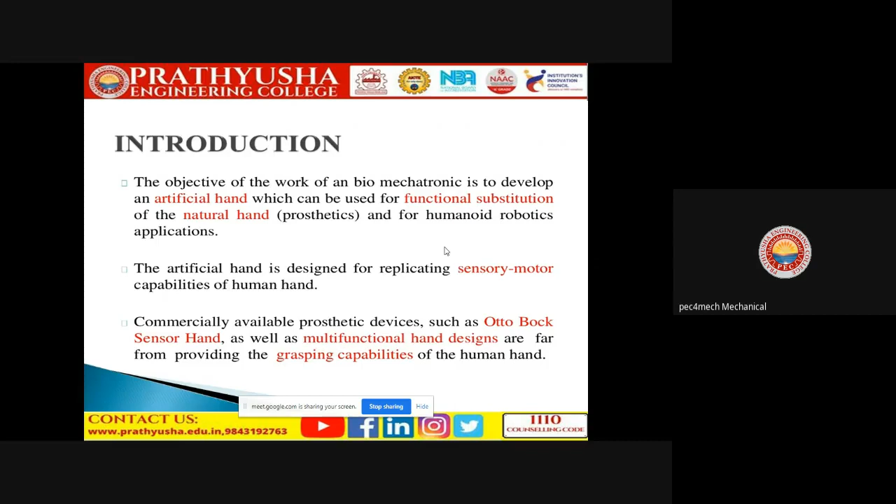So they need to do day-to-day work like us. To fulfill that task, the artificial hand is designed for replicating sensory motor capabilities like a human hand. There are some prosthetic devices commercially available, such as Otto Bock Sensor Hand as well as multifunction hand designs, which are far from providing the grasping capabilities of the human hand.

In prosthetic hands, the active bending is restricted to only 2 or 3 joints, and it is actuated by a single motor drive, which can act simultaneously on the MP joints, that is metacarpophalangeal joints of the thumb. In our fingers we have 3 joints: one is MP joint, the middle one is the PIP joint, that is proximal interphalangeal joint, as well as the DIP joint, distal interphalangeal joint.

Of the index and middle finger, while other joints can bend only passively. There is some limitation due to the very basic requirement of limited size and weight necessary for prosthetic applications.

On the other hand, robotic hands achieve a high level of performance in grasping and manipulation, but they make use of large controllers, which is not applicable in prosthetics or humanoid robotics, wherever it is necessary to provide the user with a wearable artificial hand.

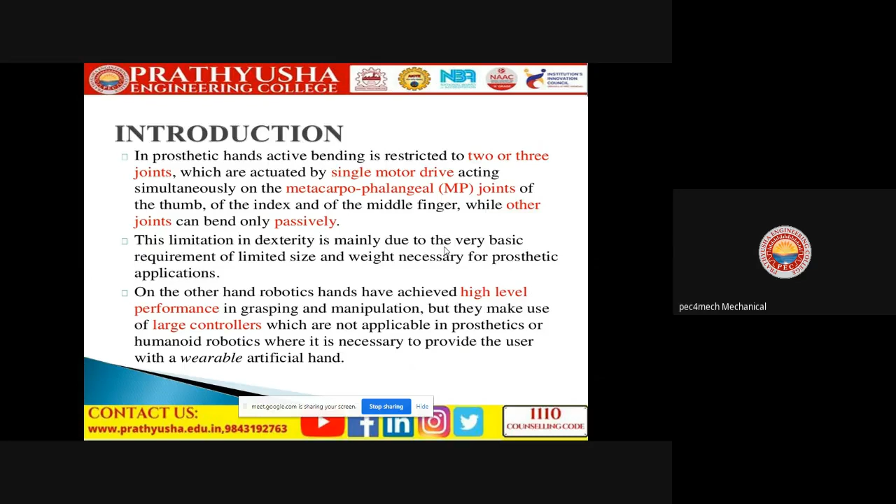So the basic design of the biomechatronic hand has main requirements to be considered since the very beginning of an artificial hand design: natural appearance, controllability, noiseless operation, light weight, and low power consumption. These requirements can be fulfilled by implementing an integrated design approach aimed at embedding different functions, mechanisms, actuation, sensing and control.

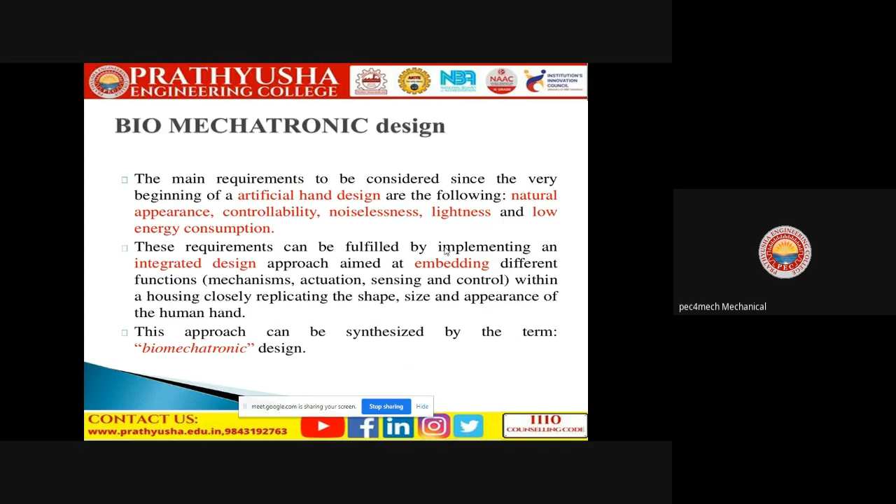This approach can be synthesized by the term biomechatronic design. The architecture is initially developed with 3 fingers to provide a tripod grasp, so objects of different size and shape can be grasped. It is equipped with 3 fingers: a thumb as well as 2 identical fingers. This is the prototype developed here.

The finger actuator system is based on 2 micro actuators, which drive the metacarpophalangeal joint, MP joint, and the proximal interphalangeal joint, PIP joint, for cosmetic reasons. Both actuators are fully integrated in the hand structure: the first in the palm and the second within the proximal phalange.

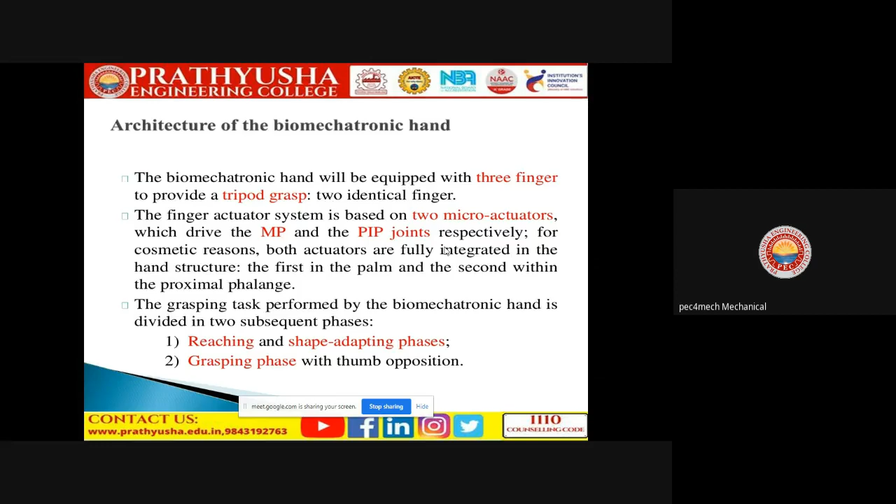The grasping task performed by the biomechatronic hand is divided into 2 subsequent phases. The first phase is reaching and shape adapting, and the second is the grasping phase with thumb opposition. This is the architecture of the biomechatronic hand.

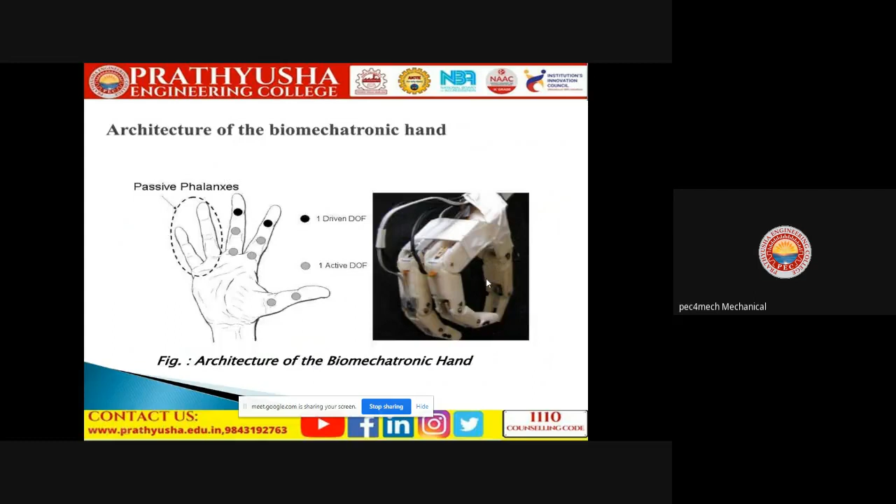Regarding the actuation system, the adoption of bulky and heavy actuators in the design of commercial upper limb prosthetics leads to an extreme reduction of degrees of freedom. What is degrees of freedom? Based upon the movement and linkages, we calculate the degrees of freedom in a mechanism. Consequently, a stable grasp can be achieved by means of high grip forces.

Starting from this viewpoint, we are developing an artificial hand actuated by microdrives. Due to its enhanced mobility, our hand will be able to increase the contact areas between the phalanxes as well as the grasped object.

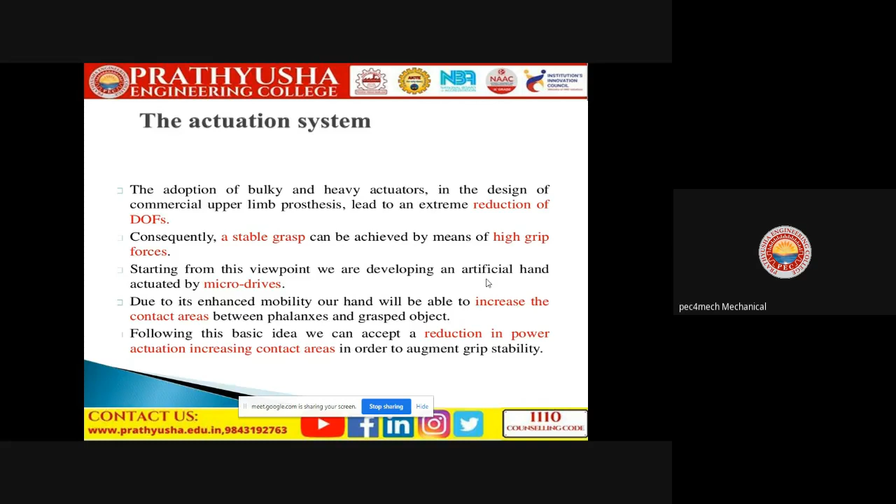So this is the approach or the methodology of how the actuation system is working. The micro actuators tend to increment the degrees of freedom. Whenever the degrees of freedom is incremented, the grasping capability is also incremented, so that the contact area is increased, and the grasping stability is also increased, which leads to a reduction in pinch forces.

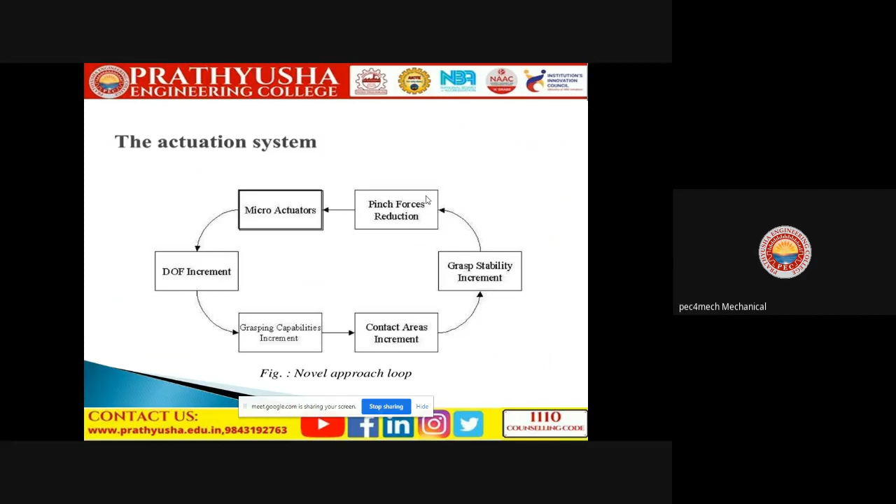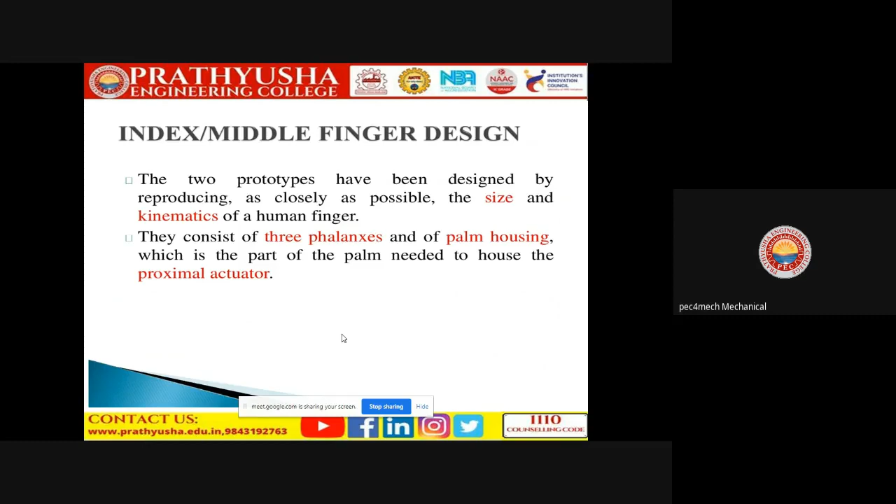As I already explained with the figure, this is the MP joint, the metacarpophalangeal joint, and this is the proximal interphalangeal joint, and this is the distal interphalangeal joint.

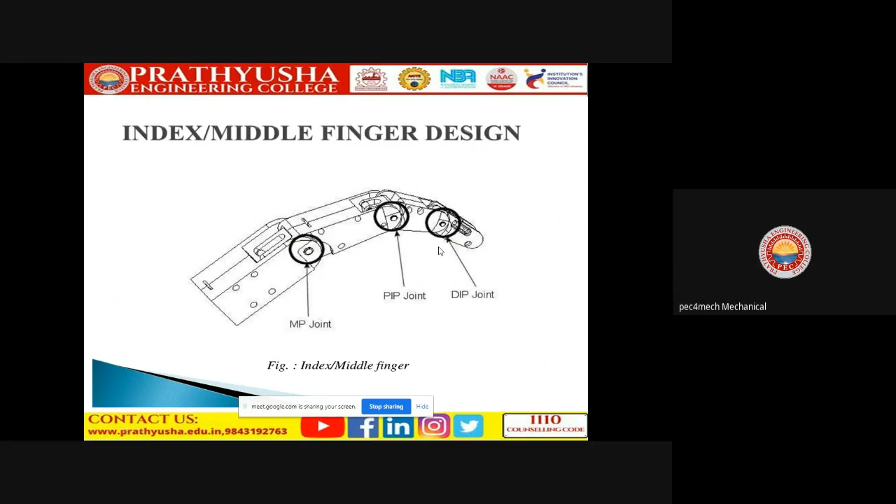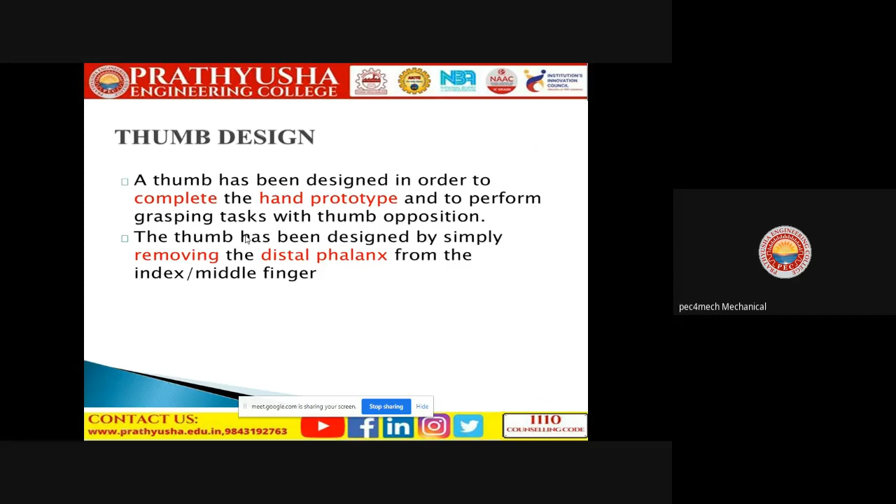So the thumb has been designed in order to complete the hand prototype and to perform grasping tasks with thumb opposition. The thumb has been designed by simply removing the distal phalanx from the index or middle finger. So this is the thumb design.

Now we can see it only has the MP joint and the IP joint. The distal phalanx has been removed.

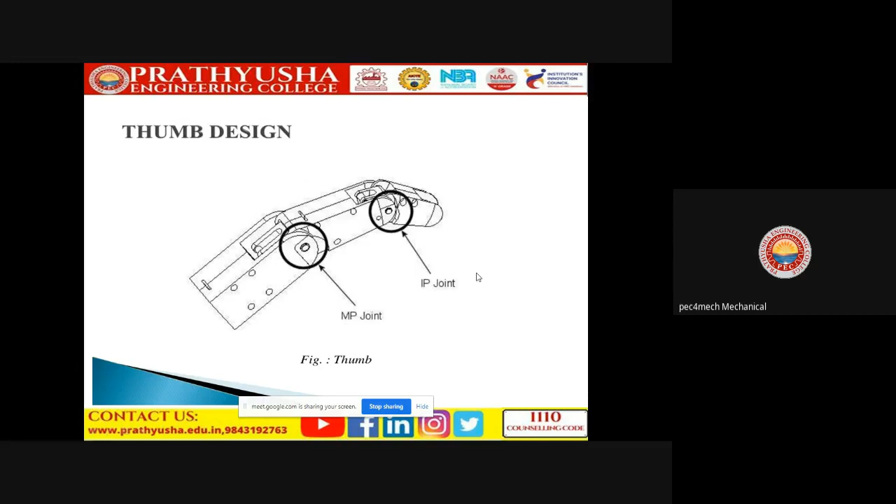The hand assembling and fabrication. The first prototype of the hand has been developed incorporating 2 fingers and a thumb. In fact, at least 3 hard fingers are necessary to completely restrain an object. So the assembling process allows the hand prototype to perform 2 grasping tasks initially.

One is to grasp a cylindrical object, and the second is the tripod pinch. The hand prototype has been fabricated using the fused deposition modeling (FDM) process. So it has been fabricated by this method.

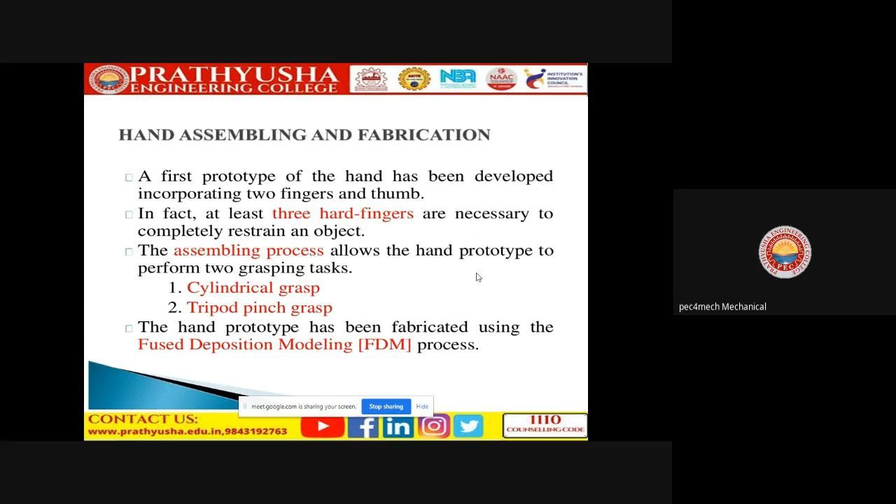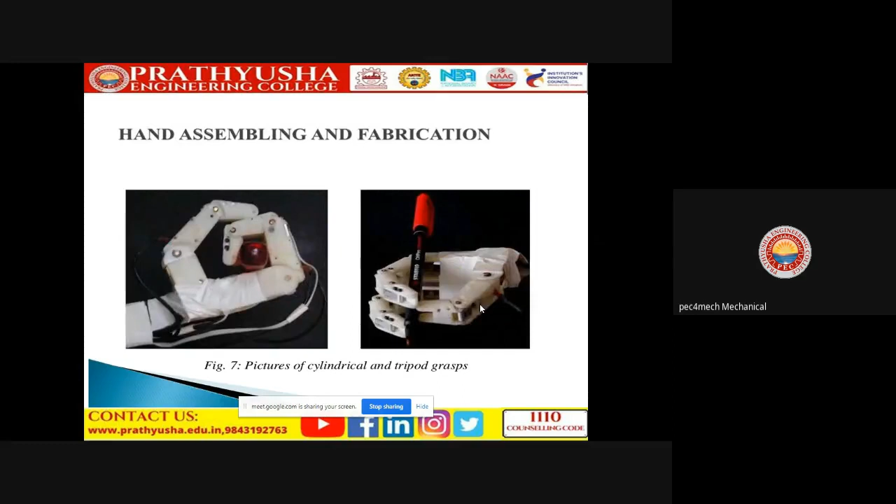So the hand assembling and fabrication. Initially in the first figure, you can see the cylindrical bottle grasp, and in the second one, you can see the tripod grasp. The pictures of the cylindrical and tripod grasp are shown here.

The fingertip force characterization: a first set of experimental tests has been performed in order to evaluate the force that the index/middle finger is able to exert on an external object. The aim was to measure the force resulting when the finger is pressing directly on a force sensor, corresponding to different configurations of the joints.

So there were 2 pressing tasks identified in order to evaluate separately and independently the force obtained by the 2 actuators. The first task is the pushing action exerted only by the distal actuator, and the second task is the pushing action exerted only by the proximal actuator.

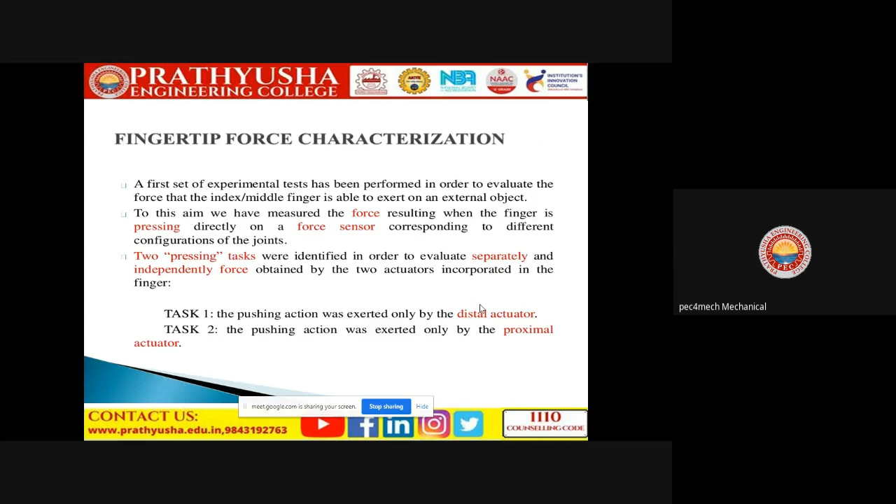So there have been 6 position sensors integrated in the hand structure in order to measure the angular position of the 6 active joints. For that, we are using Hall effect sensors. The main advantages of Hall effect sensors are the small size and the contactless working principle, which allows us to avoid friction forces.

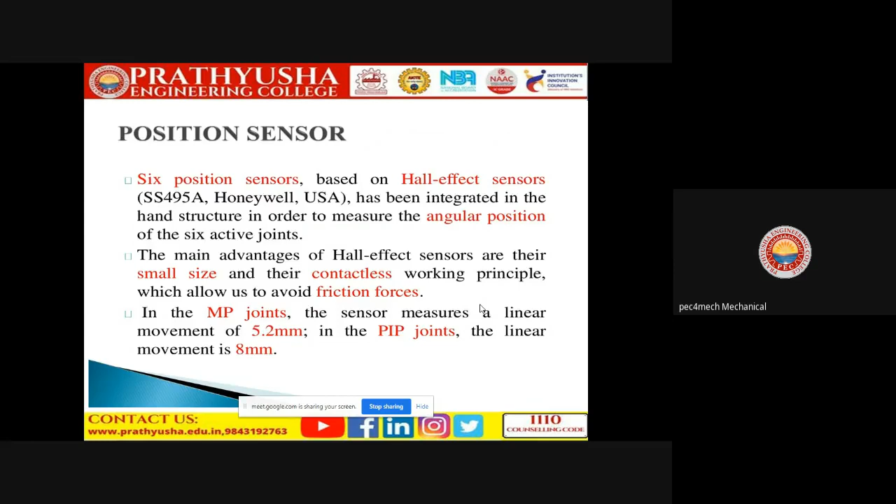So in the MP joints, the sensor measures a linear movement of 5.2 mm, and in the PIP joints, the linear movement is 8 mm. So this is the position sensor used: a slider for the MP joint and a slider for the PIP joint.

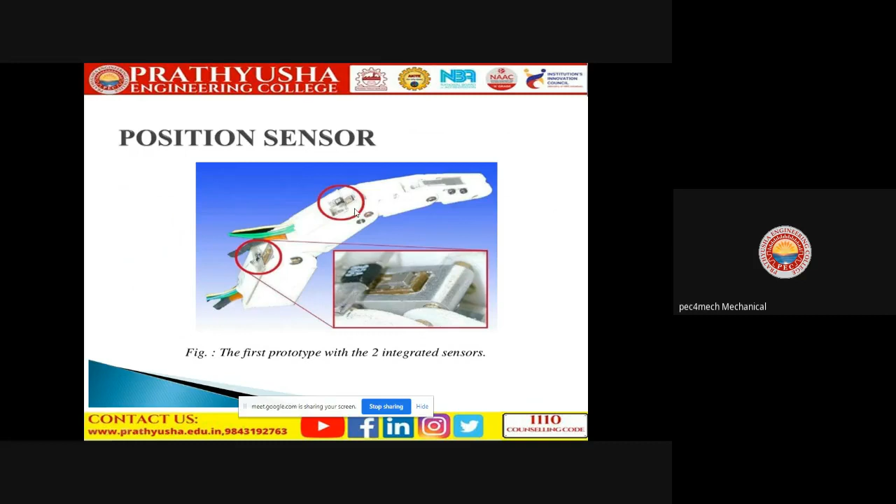What are the future improvements of this biomechatronic hand? Since it has been commercialized by some companies like Bionics, in order to minimize the cost, we need to improve certain things. The experimental tests showed promising results, but there is still room for improvement.

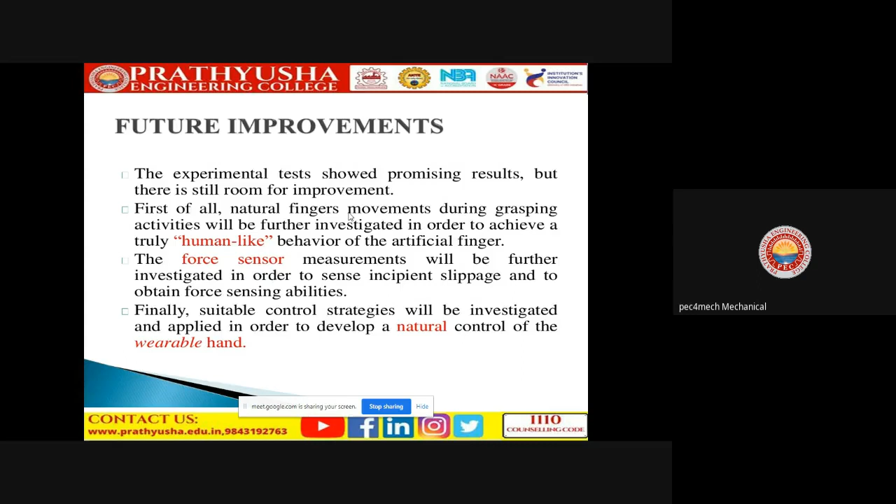First of all, the natural finger movements during grasping activities will be further investigated, because the prototype has only 2 index fingers and 1 thumb. In order to achieve a truly human-like behavior of the artificial finger, force sensor measurement will be further investigated to sense slippage and obtain force sensing abilities. Finally, suitable control strategies will be investigated and applied in order to develop a natural control of the wearable hand.